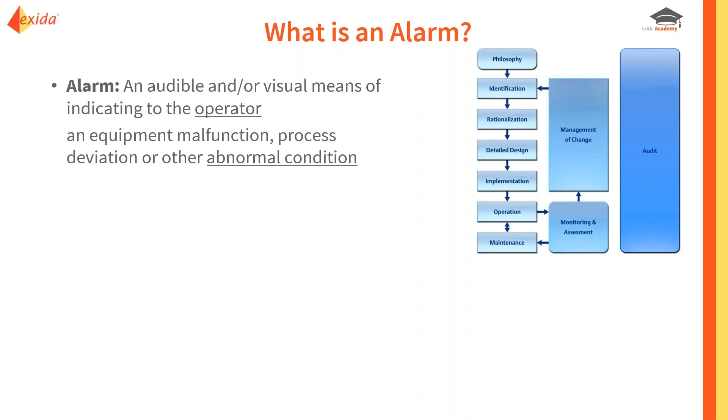Second point, an alarm is an equipment malfunction, process deviation, or other abnormal condition. Why would I highlight abnormal condition? Because an alarm is supposed to indicate that something is wrong, something unexpected has occurred. And then last but not least, it requires a timely response. And I don't mean silencing the horn or acknowledging an alarm. They don't count. They don't actually correct the problem. So we mean things like opening a valve, turning on a backup pump, something that will actually correct the situation.

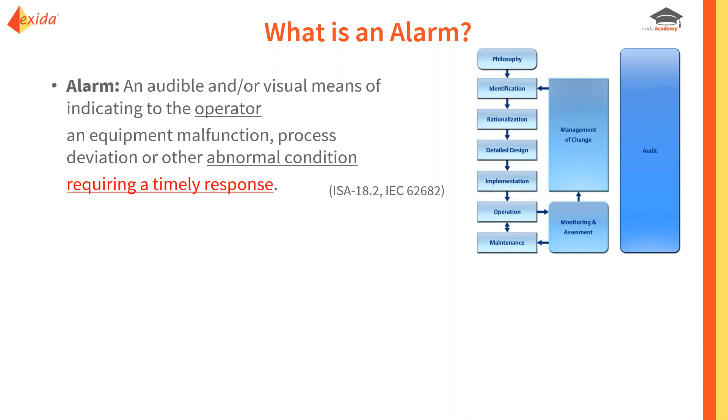Now, the process of alarm rationalization, which is something we're going to talk about a little bit, is essentially going through the alarms in your system and making sure that they meet this definition of an alarm. And by judging against this criteria, you can actually weed out the points that should not be an alarm, thus cleaning up your alarm system and improving the performance.

One of the typical reasons why folks have poor alarm system performance, too many alarms, is that they use the alarm system to communicate everything that the operator needs to know, whether it's a true alarm according to this matrix or not. So it actually makes sense to think a little differently and say, well, if it's not a true alarm, let's create other categories for that and then display those non-alarms separately than true alarms.

And if we can eliminate any intermixing of them, then when an operator gets an alarm or some kind of notification within the alarm summary display, they know that it is an alarm, that it's an abnormal situation and that it requires their action. So there's no hesitation as to whether it's something they need to respond to or whether it's something that's just for informational purposes. You can display them in alternate views.

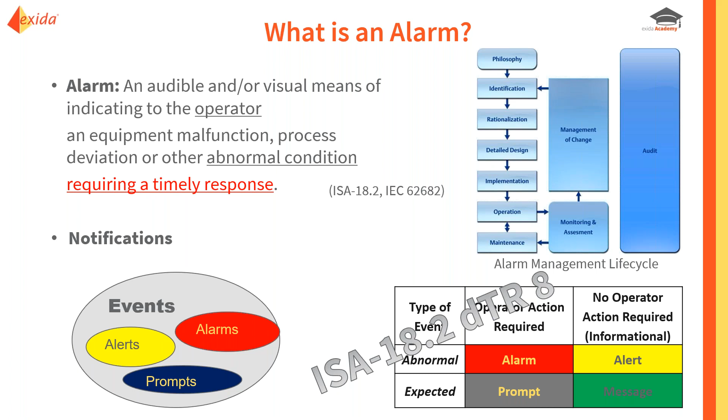There's actually an activity going on right now. One of the working groups within the 18.2 committee is chartered with writing a technical report on how to deal with these non-alarms. So how to best deal with alerts, prompts, and messages.

Now, in this presentation, we're going to go back and forth between talking about alarm management functionality using the ISA 18 and IEC terminology, so things like alarm shelving, but then we'll also talk about the analogous term from PCS7 vocabulary, which would be, in this case, manual alarm hiding. So I'll always try and make that connection so that you can tell when something is being talked about in the standard as a generic term, how it actually applies directly to a PCS7 system.

So let's get started. Now, rather than just kind of throwing out, here's some cool features to think about, which wouldn't necessarily be very helpful in understanding how it all goes together and what it can really do for you, what we're going to do is to talk about some selected features from the framework of an overall alarm management program. And in this case, this is the one that Exida uses.

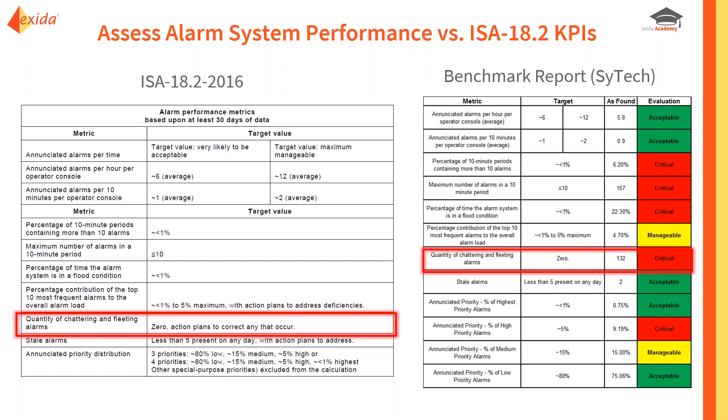And that will help you know some of your key battles to be fought. And then you can trend that over time to see how your KPIs are changing, hopefully in the positive direction. Another thing that these tools can do, or another key capability to take advantage of, is to create individual reports that highlight alarms that fall into those alarm management issues categories that we talked about. So bad actors was one of the categories.

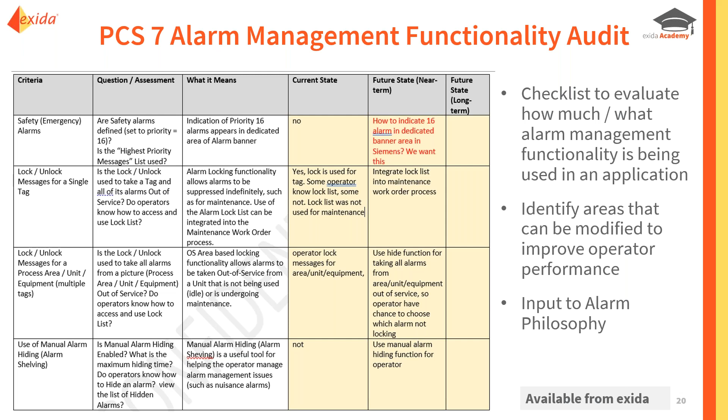So here's some examples of things that we're actually going to look at today: the use of or definition of safety alarms, the locking of alarm messages, essentially suppression of messages, and the use of alarm shelving. So that kind of stuff is built into this questionnaire, which then can be used to help identify things that you want to change in your PCS7 system, or to identify scenarios that you want to get clearer upon or update in your alarm philosophy document. So now let's talk about step 2, which is creating the alarm philosophy.

We are in the process of revising and updating the 18.2 standard, and I believe it will come out later this year, 2022, as a newer version. And I don't think there are any additions to the list of content. The last time I saw what was happening, there was none.

No, it doesn't. In this case, if it's required, it means you should have a section in your alarm philosophy that talks about how you will use alarm response procedures. And it could be, we do not intend to use alarm response procedures, and that would be sufficient. You have identified whether you're going to use them or how you're going to use them.

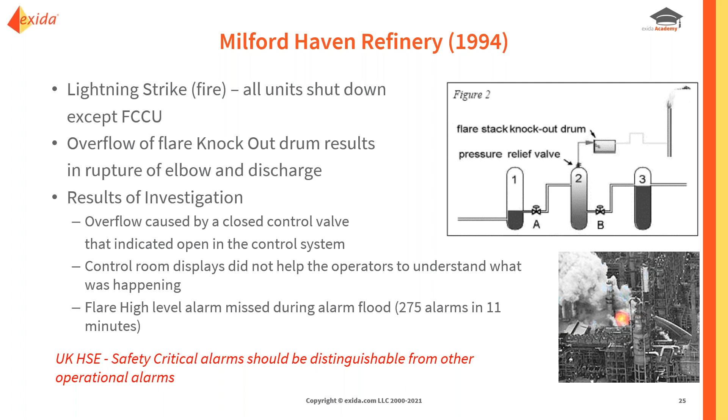So during the investigation, the HSE in the United Kingdom, one of their takeaways was, lesson learned, safety critical alarms should be very obvious, very visible. They should be distinguishable from other operational alarms so that the operator always has a handle on whether there is a safety critical alarm present or active. That would have hopefully helped in this particular situation.

So what does that mean in PCS 7? Well, PCS 7 is designed so that the highest priority alarm, priority 16, or alarms of priority 16, anytime one of those occurs, and hopefully it's infrequent, it would turn this symbol active in the alarm banner. So the operator has a single place to look to know whether there's any safety critical alarms active.

And then they can click on that and call up a display that has just safety critical alarms, just the alarms of that priority 16. So pretty useful capability, and one that provides that visibility to safety alarms that the UK HSE was asking for.

But guess what? If you have all your priorities left at 0 for all of your alarms, guess what functionality is not going to work? This functionality. So unless you go through rationalization and prioritization and set priorities of alarms, including some to priority 16, this very useful capability is not going to be active in your system.

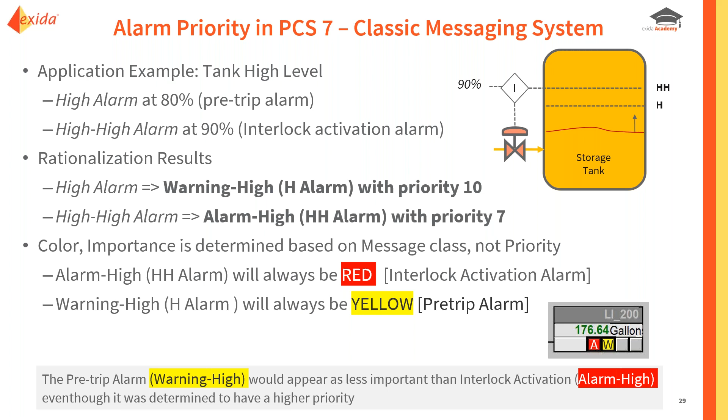So the warning has the higher priority, but because of its alarm type, it's treated as not as important as the interlock activation alarm. So the warning high would be yellow, even though it has the higher priority. So that would be kind of problematic and inconsistent if you were prioritizing alarms in this way. So what Siemens did is said, okay, well, we need to provide some flexibility for users to change the way the importance of an alarm is identified and how that works.

So they decided to call the original way, the default, the classic messaging system. And then they defined a new way called the user-defined messaging system. And the big difference between the two is you can actually customize what you call the message types or the message classes. So instead of alarm high and alarm low, we can change it to critical, high, medium, and low, things that you might expect to be used when assigning the priority of an alarm.

So that means now we have broken the connection between alarm type per se and importance. Now, for each alarm, we set what this message type name is, and that directly aligns with a specific importance. So the critical priority, if you want to call it that, would be importance number 1. The high priority, no matter what alarm type it is, would be the second highest in importance.

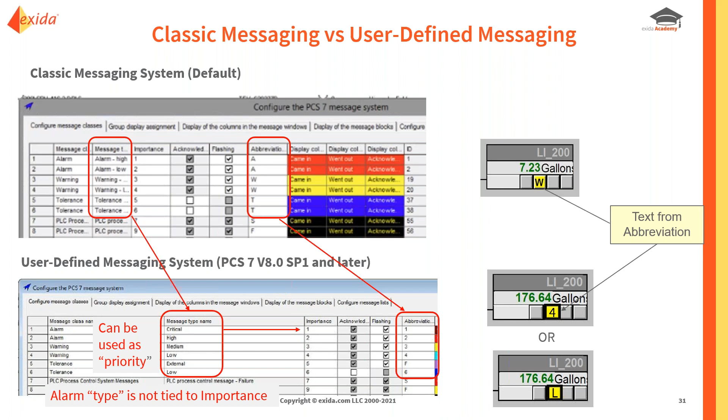So in the user-defined messaging system, the chiclets might be displayed like this, where we're showing that's an alarm of priority or importance number 4, or that is of a low priority, low importance. Very different from the classic system.

What does that mean to rationalization or assigning the priority? In the classic message system, you set essentially the priority attribute by changing it numerically from 0 to 16. With the user-defined messaging system, you would actually change the message class assignment instead, and you would set it to one of those priority names that we had defined earlier. So critical, medium, high, low, or whatever you want to do, that's how you would assign it. So that would link to the importance and thus the priority of the alarm.

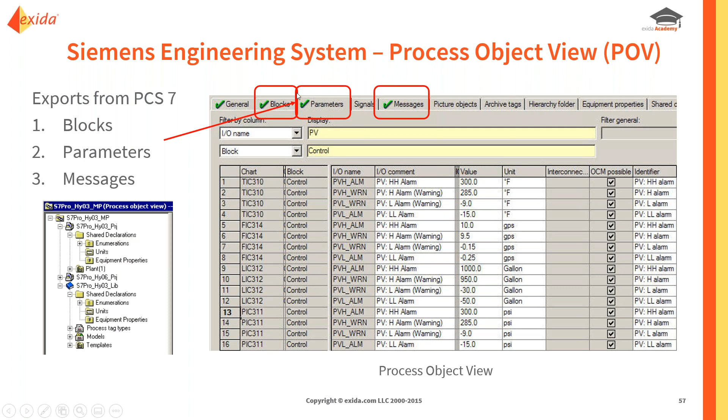So now let's talk about alarm rationalization. We want to create a master alarm database first. So how do we do that? Well, the alarm information can be extracted from the process object view from a couple of the different tabs, such as blocks, parameters, and messages. We can export that, and then we can kind of combine, glob together those 3 files into something that's coherent that we can then load into our rationalization tool, which is called SILAlarm.

You'll find that some of the alarm configuration resides in the messages, some in the parameters, and some naming in the block. So you really do kind of need to pull stuff from each of those 3 and put it all together to completely characterize one alarm. So this is something that we do with PCS7 system, and then when the rationalization is complete, we go in the reverse direction, and then you could import these files back into PCS7 to update the configuration.

Now, the rationalization process, we're looking to make sure each alarm meets the definition of an alarm that we talked about. So part of the way we do that is by defining what the consequence would be if the alarm is not responded to, what the corrective actions would be, the likely causes, etc. Now, what's significant about consequence? Well, if there is no consequence, it shouldn't be an alarm. And if you can't define a corrective action, it also shouldn't be an alarm.

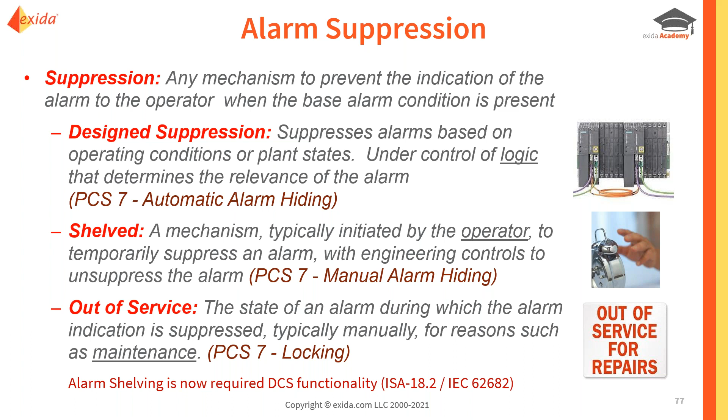And then the last form is called out of service. This is essentially suppression when the device needs maintenance. So perhaps all the alarms from the device would be suppressed. And this is called locking in PCS 7. So all 3 of these types of suppression are supported.

When it comes to shelving, this is something that's different from enabling or disabling the alarm, because when the operator shelves the alarm, it goes away temporarily for a fixed period of time. And it doesn't actually disappear. It goes from the active alarm list to a suppressed alarm list. So the operator can always see that alarm and go find it and unsuppress it if need be.

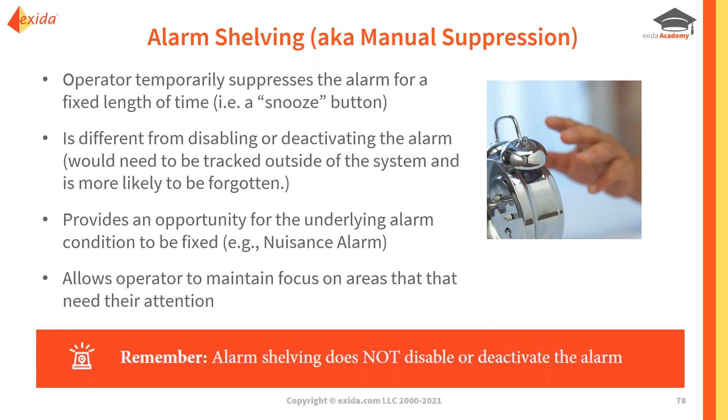But what this function does is allow operators to better be able to manage nuisance alarms and get them out of their view so that they can be fixed, or you can write a maintenance work order or whatever. So within PCS 7, this shelving capability is provided. It's a single timer that would be used for every alarm, so it's system-wide. So you could, for example, set it to allow shelving of 30-minute duration. That's what's shown here. That is adjustable up to just below 10 days.

So you definitely want to think about potentially using this and how you would use it, and when it makes sense to be used, whether there's any special authorization required, and capture all that in your alarm philosophy.

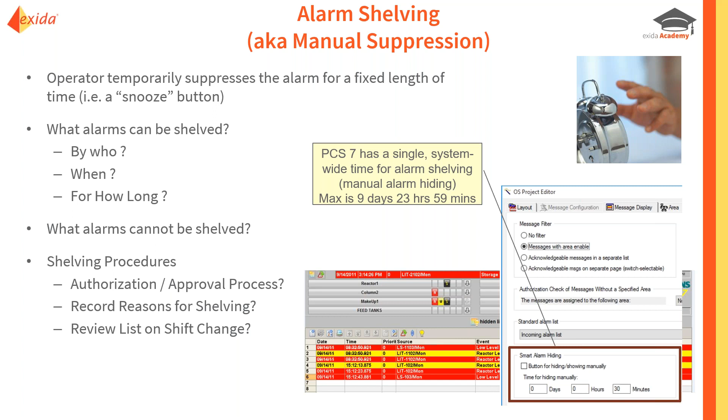Now, if alarms and the associated hardware are not working and require maintenance, then we want to take the device out of service. So you can do that from a faceplate, and that will essentially suppress all of the alarms that come from this particular tag or this particular device. And that's called locking. Those alarms will then appear on the locked alarm list.

So this is very useful capability, but of course we would need to train the operations and maintenance team that when we suppress an alarm for maintenance, we use this locking functionality, and then we monitor and look at the locked alarm list to kind of track when things are in maintenance mode and when they're removed out of maintenance mode.

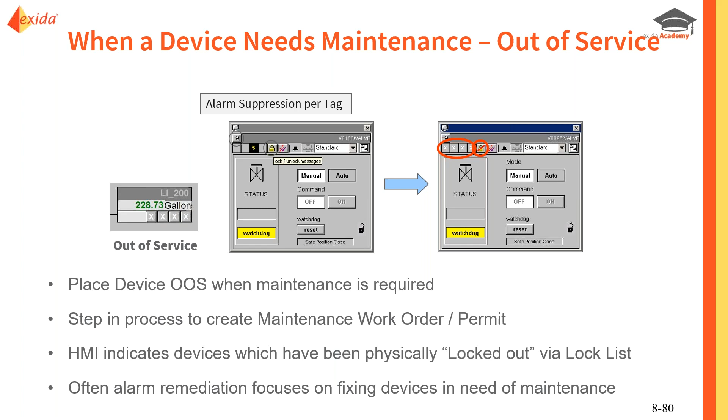And sometimes when you start the remediation process or the alarm rationalization process, you quickly find that one of the major sources of problems is alarms for devices that aren't working correctly. And you need to leverage this locking capability to help you fix those alarms and get them out of the operator's view.

But one of the constraints, one of the things to think about is, are there scenarios where there are still one or two alarms that need to remain active? So if you've got safety alarms, let's say for high pressure in the reactor, and all the alarms can be suppressed, but these one or two alarms still need to remain, that's hard to do if you're using this locking. So that might mean that you couldn't use this area-based locking in that circumstance.

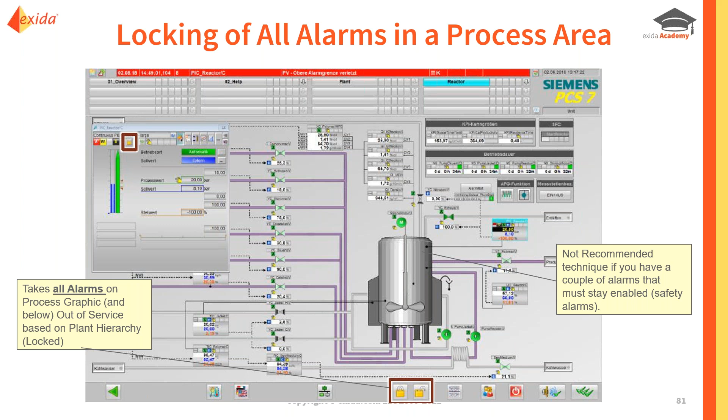In that case, you might be better using a design suppression methodology. And the way that works, there's really two steps to it. First, we define a state detection algorithm. So what are the conditions that must be present to indicate the state? And then what do we want to do with the alarms? Which alarms need to be suppressed or have something else occur?

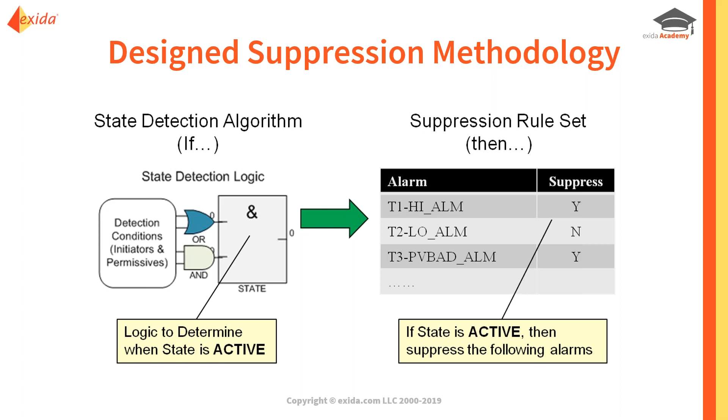Now PCS 7 supports design suppression. It's actually called automatic alarm hiding. There's good details on how to set this up in one of the technical support entries. But basically, the way it works is you can define up to 32 states for a given alarm.

And what we have here is what's called a hiding matrix. In the process object view, each row is a separate alarm, and these columns that you see here are the potentially up to 32 different states. And you go through and you check or uncheck based on whether you want to suppress the alarm when that state is active.

And then within the AS control system, we have to figure out or create some logic to indicate which state, which of those 32 states here, is the one that's active at any one point in time. And there is a special block created to do that called the STATEREP block. So that would be laid down and then some logic connected to it to help determine which of the 32 states is active. And with that information, that would be propagated up to the ES.

Now, the alarms that actually are created for the devices and the process, they go off as normal. And when they come into the OS, if they're to be impacted by the hiding matrix, then it would essentially filter them out. So the operator would not see them in the OS runtime. They would, however, go to the archive because they are alarms that occurred. So this is how you could define design suppression, automatic alarm hiding in PCS7.

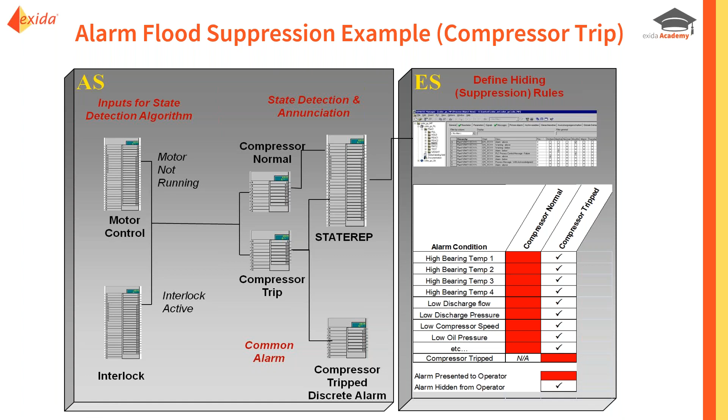And then we can define the hiding matrix accordingly so that all the typical alarms that you would expect will be suppressed if the compressor trip is detected, but the compressor common alarm would be presented to the operator. And how might we do that?

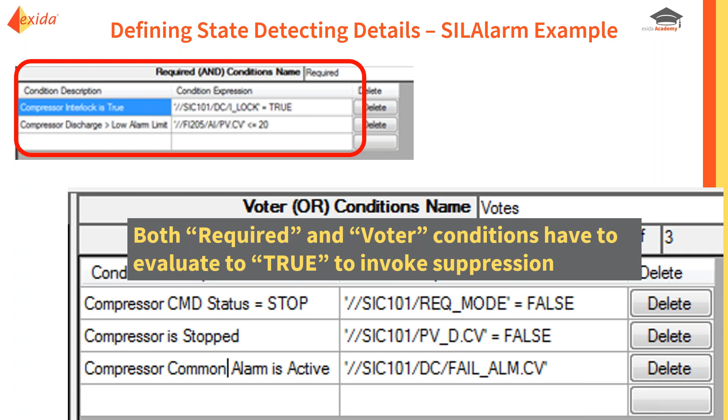In the SIL alarm system, we can define the detection conditions, and they can be conditions that must be true or that can be looked at in a voting scheme. And then we can define which alarm should be suppressed. We filter the database, perhaps based on the process area. It identifies which alarms that we're dealing with, and then we can check on an individual basis whether we want the alarm to be suppressed. So this is a key difference from the area locking, where every alarm on a tag is going to be suppressed. In this case, you can choose which alarms to be suppressed.

And then those would be loaded into the suppression group, and then ultimately that's going to be passed back on to PCS7. Now, one of the things that this does is it shows you for each alarm that you are thinking should be suppressed, gives you the priority, the classification, and it also tells you whether you have claimed the alarm as a safeguard or an independent protection layer in the SIL alarm database. Because if you have, you might say, well, we should not suppress those alarms, or we need to do more due diligence to make sure it's acceptable to suppress.

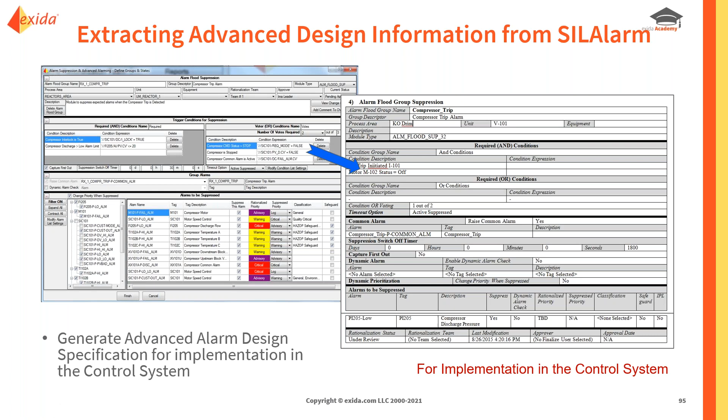Anyway, so we've defined the design for how we want that to work in SIL alarm. We can extract that into a design spec that someone could take and then implement in the PCS7 system with this information. And we can extract some of that configuration to an Excel spreadsheet and then import that into the process object view, hopefully defining the hiding configuration, which boxes should be checked and which ones shouldn't be, based on automatically defining that in SIL alarm. So this would help you not only define how you want the suppression to work, but actually help you kind of automatically configure it from your design spec.

So now, finally going through the last couple of steps just for completeness here, monitoring and assessment of alarm system performance. Same tools that we talked about earlier would be relevant here. In terms of the process, this is much more the tools identifying which alarms are not working and then going through the rationalization process to fix them.